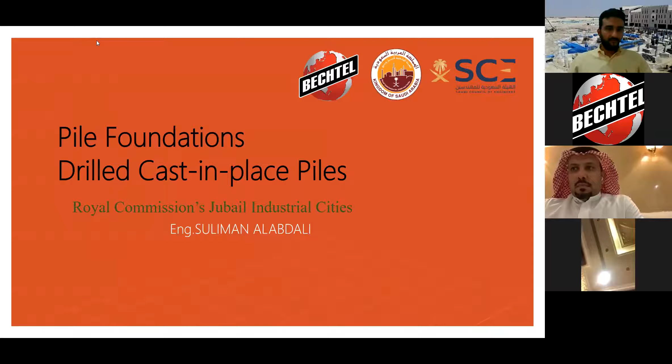Let me share. Okay. It is about the pile foundation, drilled cast-in-place piles. This is an overview of my presentation. I'm going to talk about the acceptance criteria of the pile work, general requirements for the drilled cast-in-place, what pile foundations are, and the purpose of the pile foundation itself. And also I'm going to talk about the testing of the piles. This testing should be carried out after

casting the piles. These are some of the references that you can use. They are very useful references, actually. This is the ACI, American Concrete Institute, and ASTM. This is very useful. You can use it in the testing, and you can use it when you are drilling.

I will talk in general about the use of the pile. As you all know, piles are one of the methods for improving the soil. That means we have some soil that is very loose. It is not dense, not rocky soil. So we are using the pile. The main purpose of the pile is to transfer the whole load from the building to the foundation, and from the foundation to the pile.

For sure, we have a big difference in bearing capacity across soils in the kingdom. I'm going to talk about the kingdom. And just a small hint regarding how we know that we have an issue with the bearing capacity of a specific land. This should be done by soil investigation. As most of you are civil engineers, you know that we have to do SPT, CPT, and a lot of tests to investigate this land and see whether we have an issue with the bearing capacity or not.

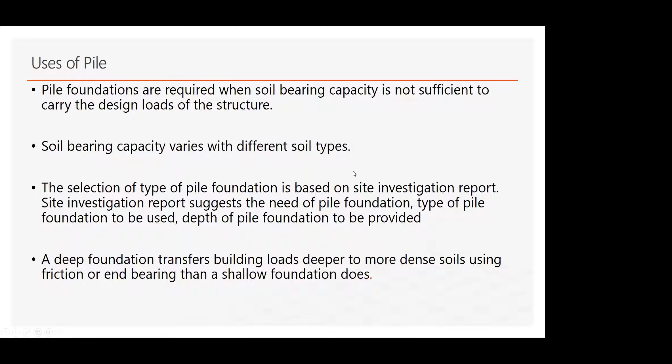Just to make a very clear idea about the bearing capacity: it is to avoid the foundation to penetrate or to sink inside the soil or to flip over. This is one of the main purposes of the bearing capacity. This is a general idea about it, actually. And sure, it is like a deep foundation, it transfers the building load, as I already mentioned.

Okay, this is actually some requirements. I think it is very important in any pile activities, because actually, if you see in my background, this whole area, it was all only piles. So during this activity, it's gonna be a very, very messy site, like a lot of slurry, muddy and concrete, and a lot of things that we have to take care of.

First of all, we have to do a traffic management plan, the TMP. This is to distinguish between the pedestrians, the trucks, trucks of concrete, bulldozer, backhoe, concrete pump, and the rig machine that is used for drilling. A lot of things we have to take care of, and we have to agree before we start this activity.

Actually, one of our requirements here in Royal Commission, we have to do the method statement. How we're gonna work? What are the key personnel that have to be on site to supervise these procedures? What is the emergency contingency plan? All these things we have to take care of. And I'm going to talk about the things that we have in our contract between us as a Royal Commission and our contractor.

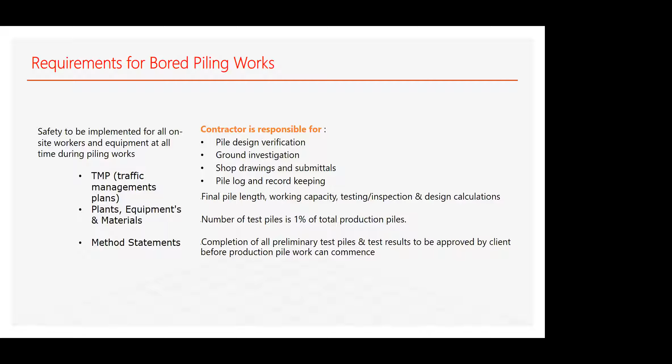As I mentioned here, we did like 1% of the total production piles, completion of all preliminary test piles. This is the test pile that I already talked about. It is only for test. We will not use it. We will not connect it to the foundation. If we want to take it out, we're gonna take it. So it is not useful anymore.

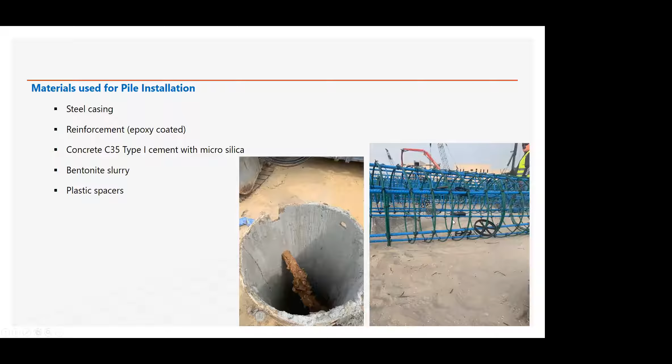Let me explain something about the bentonite. Maybe you will ask me why we are using bentonite. Actually, we use bentonite because our soil condition is very weak. It avoids any collapse. For example, if you drill your pier or pile and leave it for half an hour, or 2 or 3 days, if you drilled it to 15 meters, the next day you may find it has become 10 meters. A lot of collapse will happen, and this will reduce the length of the pile. And when anything happens to the length of the pile, it will for sure fail any test done in the future.

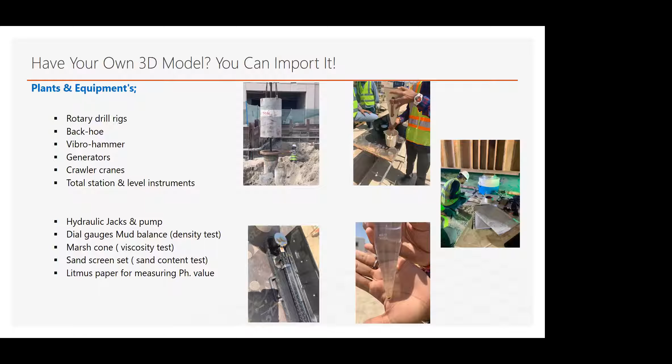By the way, bentonite is sometimes used in trenches that cannot have a good slope. To avoid any collapse, they put the bentonite in temporarily. And this is the litmus paper for measuring; we also measure the pH. So we have the viscosity test, density test, sand content test, and pH. This is only for bentonite.

For example, I have a pile like 30 meters length. So I have to make sure that the rotary is exceeding my 30 meters. It is not like 15 meters, because it depends on the situation. For example, Burj Khalifa, actually our subcontractor worked on that project. I think the height of the building is maybe 900 or 850, and they are using 60-meter length of pile. So if I have a rotary machine like 30-meter, it will be useless. So we have to make sure about it.

And also, what is the most important thing is the diameter of the rig machine. This rig machine comes with a head. So the head, for example, if I have my pile's diameter 800, I have to bring it like 850 or something like that, for sure. It will not be 800. I have to make it more for tolerance, for movement, the casing, and all these things.

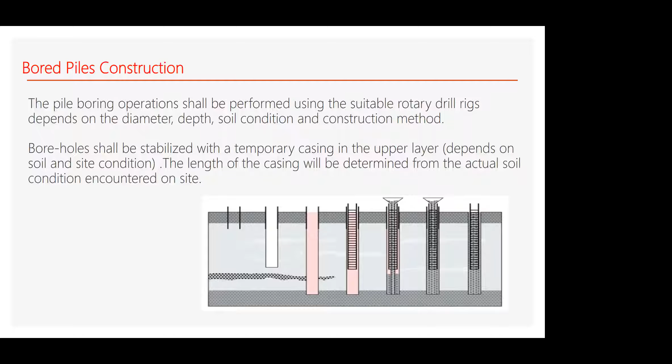As I mentioned, you can see this is the rig machine, and this is the bucket. As you can see, it is changeable. So this one is for drilling. For sure I'm gonna put the casing, and before I start any drilling activity, I will ask the surveyor to come and check the accurate coordinate on site. Am I right, or do I have some issue with the coordinate? So after I'm okay, I will give him a green light to go ahead with drilling. This auger machine or rig machine will do the drilling inside this casing.

So as I mentioned, it can verify all technical information such as pile coordinates. This should be approved by shop drawing, and also the cutoff level. For example, I have to know where I have to do the casting. If I have my pile here, my foundation should be here exactly. So I have to make sure. Sometimes I will make this pile extra to avoid any error during this thing. So I'm gonna have it like 1 meter or sometimes 50 centimeters, and then this extra I'm gonna cut later. I will show you some pictures of how we're gonna do that.

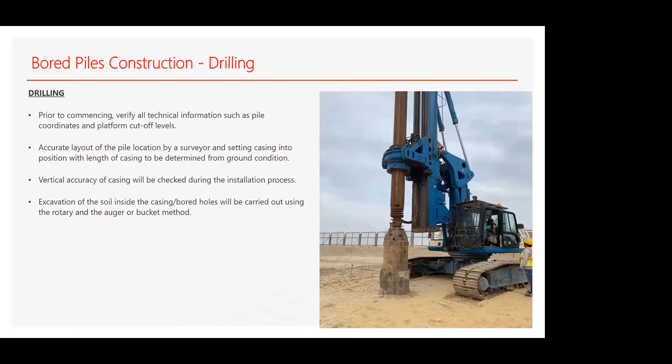So as I mentioned, drilling continues to the design foundation depth or refusal level using auger drilling. Pile length should be per the current construction drawing. For example, I have various lengths of pile. Sometimes I have 17 meters, sometimes 11 meters on the same site and for the same building, but it is a different pile cap. And by the way, we call the foundation the pile cap. So verify the final toe elevation of the pile. The toe level is the bottom of the pile.

And it has to be recorded. Each pile, we have to record everything about it: the toe level, top level, the elevation, where the cast level is, the surveyor. I'm gonna provide the contractor the exact cut-off level, the exact toe level, everything. This has to be agreed before we start.

So upon reaching the final depth, loose debris will be removed using the cleaning bucket. As I mentioned before, this is the cleaning bucket. I have to remove everything inside the pile. The depth of the hole should be checked by measurement. This is, as I mentioned, two ways.

Maybe the rig machine can have it, just to save time. Sometimes the supervisor will ask the operator, please check this level, depth, and he will check it. And then the consultant will come and use his method with a meter tape, and it is better. It will give you an accurate measurement.

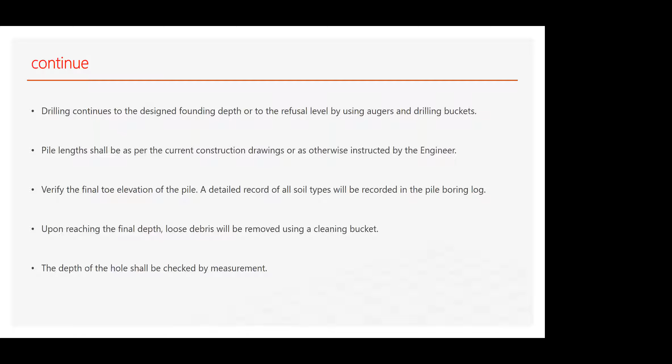Here, as you can see, after we drill the pile, we are putting bentonite, so we make sure that no collapse will happen in this pile. As I mentioned before, during the boring process, bentonite slurry is kept as high as possible so that no collapse will happen. That means the bentonite will hold on the wall of the pile, so the soil will not fall in. It gives more strength to the pile. No collapse will happen in this pile.

Upon completion of boring, the bottom of the pile is cleaned with the cleaning bucket, as I mentioned. This is what I already talked about: mud balance, density test, viscosity test, sand content, and the pH. All these are for bentonite only. So I have to make sure about my bentonite. It is very important, actually.

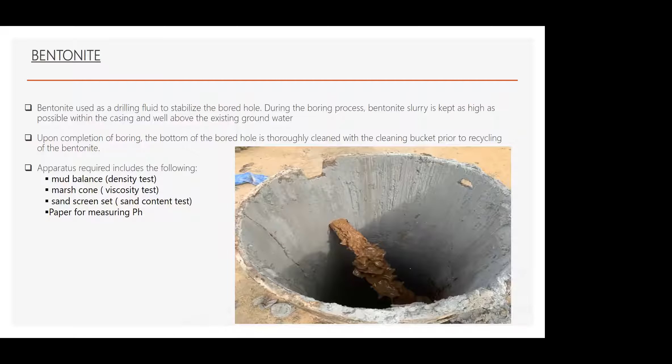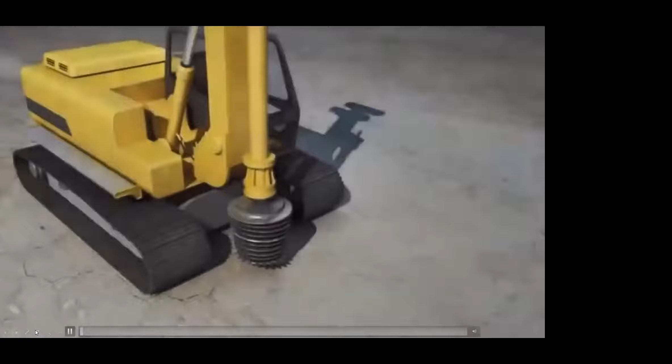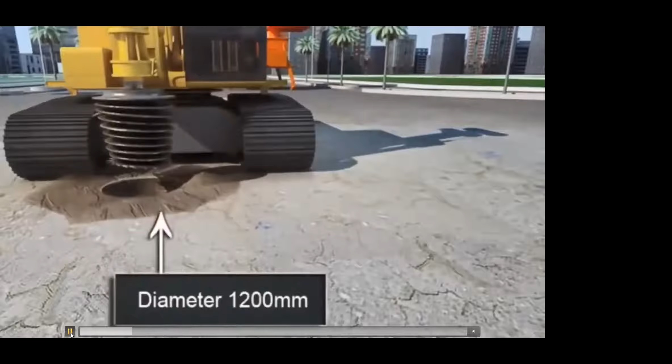This is a video I'm going to share with you. As you can see, this is actually describing the whole procedure. Here in this situation, they have a diameter of 1.2 meters. And maybe someone will ask me, according to what am I going to use this casing?

Let me explain about this project, because it was like 2 years ago. We are using the casing according to the soil condition. For example, I have a 10-meter pile. Because I have a very weak ground, I'm going to use a 7-meter or 8-meter casing, because I know the classification of this soil from 1 meter until 7 meters is very loose sand. So it is better to be cased. And I make sure the rig machine will be very vertically aligned.

So this video cannot give you a good idea whether I'm going to use a short casing or not. Actually, I worked with both. In one of the projects, I did not use any casing because the soil classification was very strong and no collapse would happen. As you can see, here we insert this casing, and I'm sorry, but this is the video that I have. In this procedure, he did not use the vibro hammer. The vibro hammer is only for inserting the casing.

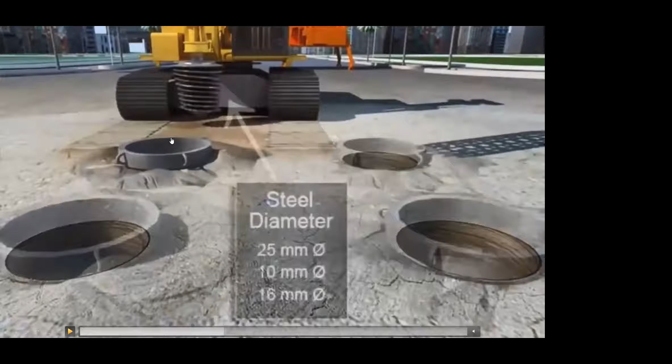Another thing I have to mention: for example, I start to drill one of these piles. If I drill this pile and cast it, I couldn't drill within 6 meters next to this pile. Otherwise, I'm going to disturb my piles. So you have to make sure to leave your pile for a minimum of 24 hours so that it will be strong enough to sustain any disturbance close to it.

After we did the drilling, we're going to insert the rebar cage. As you can see, he's inserting the rebar cage. And make sure to maintain the cover. It is very important. The cover spacers will hold the cage from the side, so it will be 7.5 centimeters everywhere around the pile. Okay, this is after inserting the cage.

This we have to use, we call it the tremie pipe. For example, if we want to cast a pile that is 17 meters, and we start our pump from the top of the pile, maybe the concrete will never reach the toe level or bottom level of the pile. So we are using this tremie pipe. It looks like a straw, taking the concrete from the top to the bottom. That's how I make sure my concrete reaches the bottom, because I should cast from the bottom until it reaches the top. So I have to make sure that I'm using the tremie pipe in the pile.

For example, my pile is 11 meter. If my pile is 11 meter, I have to use tremie pipe minimum 12 or 13 meter. So when I use the tremie pipe, I will hold it with the crane.

What's happening with the crane? The crane will take this tremie pipe and insert it inside the pile until touching the ground, then just take it up a little bit so no fall down with the concrete. Because if we use a concrete pump like 2 meter or more, actually in our specification, 1.5 meter is the maximum height for casting the concrete. Otherwise a lot of segregation will happen, because pumping with more than 1.5 meter will cause segregation with the concrete.

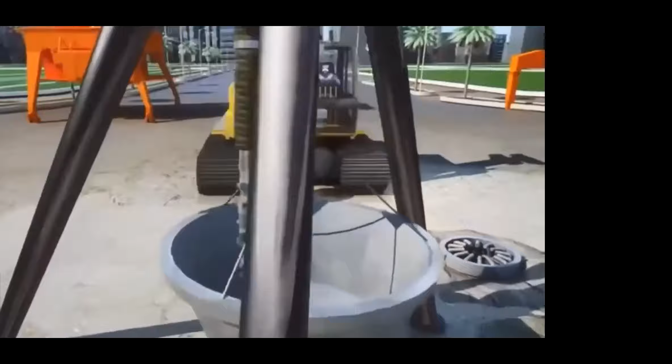By the way, when we are putting the bentonite, we are not removing it. Don't worry about the bentonite. When you cast the concrete from the bottom to the top, this casting will do some replacement of the bentonite. That means the concrete will stuck in the bottom and then kick out the bentonite all through the pipe.

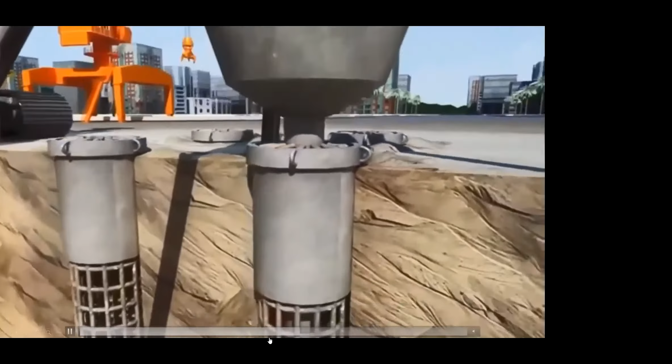Here in this sand, he did not use any bentonite because he has good soil, so no need. You can see how it is starting. The other thing I already talked about is the bentonite. If he uses bentonite, you will see it moving outside. Because of that, we are always testing the bentonite, because if the bentonite is more dense than concrete, it will never go outside of the pile. So it is very important to test the bentonite.

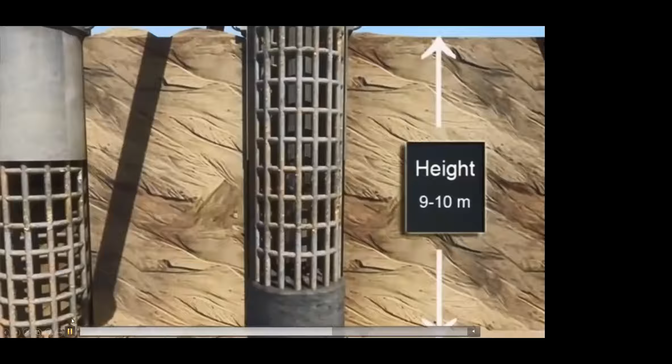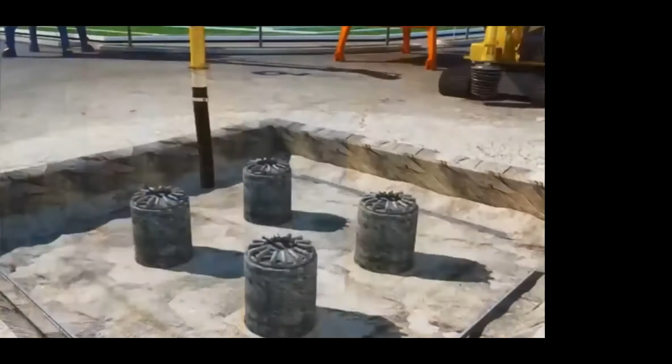This is after the casting. This video will also give you some idea about how the pile looks like.

You can see here, according to the requirement for this project, each foundation, a square foundation, should be with 4 piles.

After that, now what he is doing, he is casting the blinding for the foundation, or let us call it pile cap.

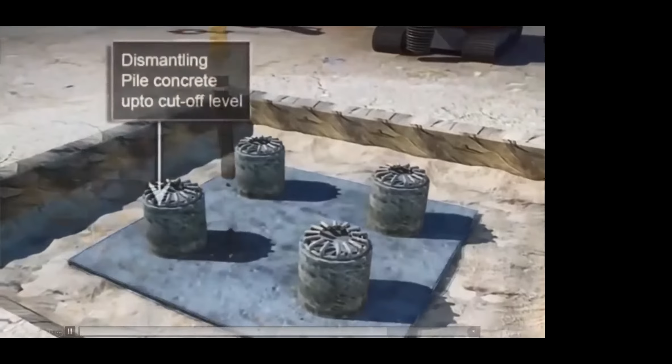Now let me go back. We already casted this pile. As I mentioned, you have to leave some extra length of the rebars. This extra length will work like a development length inside your foundation. The good practice is to leave this part covered with some PVC, so that you will not damage your rebars while connecting the pile with the foundation.

I will give you some picture. You can see he already casted the blinding, and now he is reaching the cutoff level. You can see this is the cutoff level, meaning the bottom of the foundation will be exactly at this elevation.

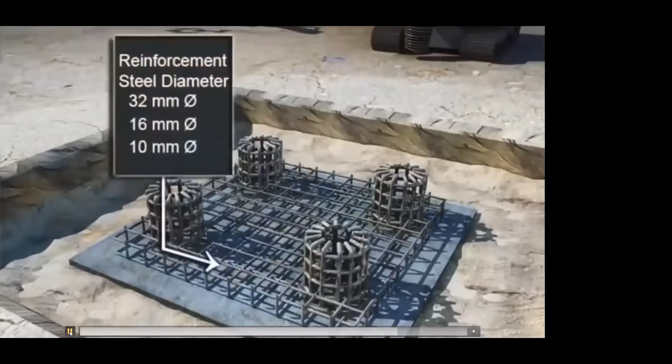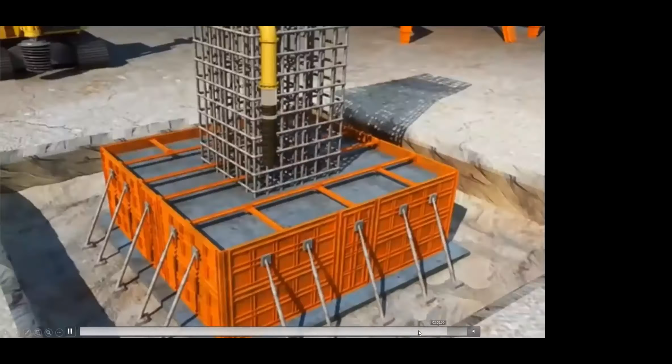And you will see they already started the pile cap. This is the reinforcement for the pile cap.

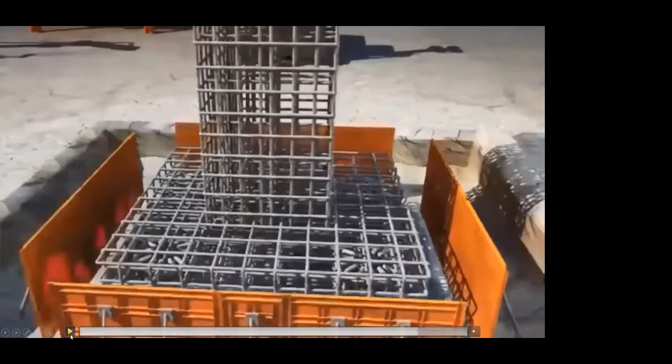After that, he's gonna put the rebars for the column, which we use to transfer the load to the pile cap, and from the pile cap to the pile. Let me explain something.

Do you know the pile is sometimes combined in type? How does the pile actually work? We have some friction pile, where all load comes from the friction of the pile. We have the end bearing pile - for example, I have a 10 meter pile, and my ground is 9 meters of loose sand, very bad soil, very loose, but the 10th meter is a rocky level. So I want to reach this rocky level, and it works like an end bearing pile.

As you can see, now I'm casting the pile cap or pile foundation. And that's it - this is my whole procedure, how I'm transferring everything.

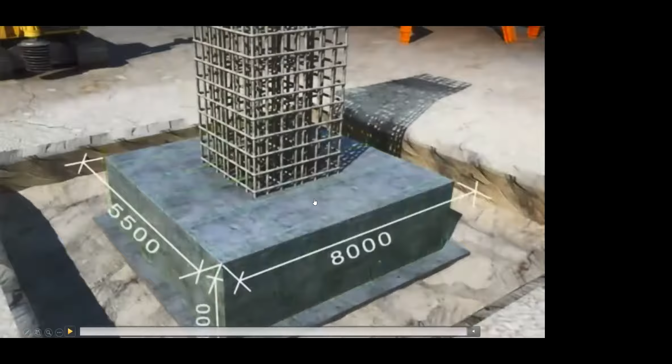But before these things, we have to make sure about two tests, very common everywhere around the world, before we proceed with the concrete. First thing, we have to make sure the concrete is according to our mix design.

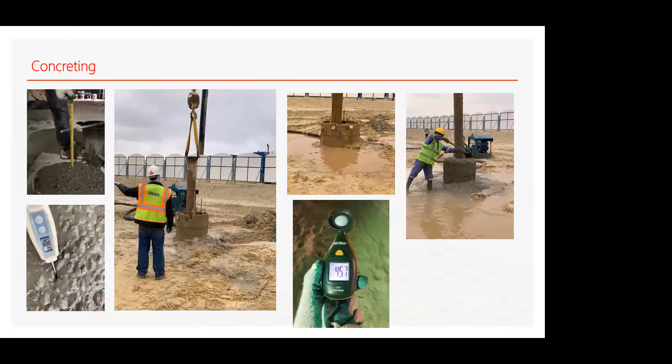Actually, you can see this is the pile size, from one of my projects I worked on. This is the pile size, the diameter and the pile length. As I mentioned before, I have 11, 13, 15, and 17 meter lengths - this is the various lengths of the pile. This is the total ultimate capacity.

Sometimes, for example, the designer will tell me this foundation will take a load, for example, 4,541. So I have an idea about how much the load is. When I know the load, I will know how to test this pile. So what I have here is the total ultimate capacity - I have to check this pile.

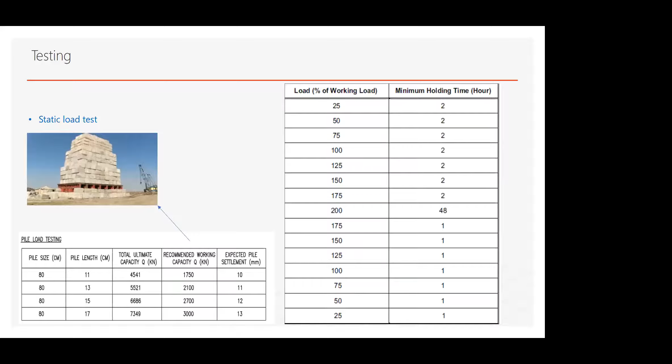Actually, sometimes as I mentioned before, maybe I had some issue during the casting - maybe I used very dry concrete, I have some segregation in the concrete, I have honeycomb, any issue - these things will figure out that I have an issue. Also, just to mention, in the static load test, if the settlement happens, I have an issue, I have to discuss with the engineer. The conclusion: the pile is not working for my site, it is not workable.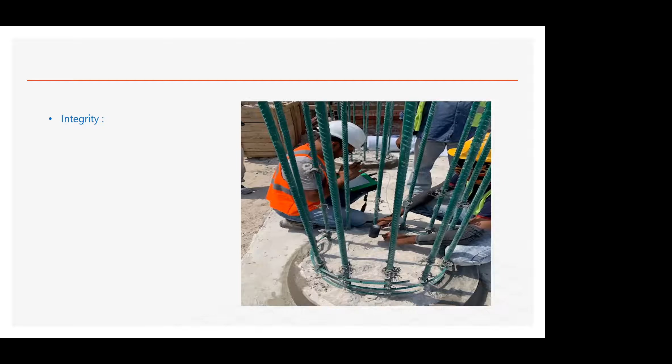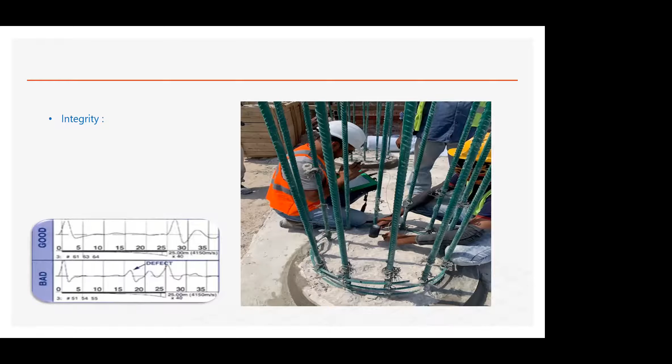So the other thing is checking if there's any issue in this pile, it will show me. As you can see here, this is the graph of the pile. For this exact graph, you can see the wave starting from 0 and going very smooth until it reaches 27 - that means after 27 meters, I don't have a pile, that means I'm okay. But the other one you can see, this is the good one - in the bottom you can see how I have a defected pile, like at 16 meters I have a defect, an issue, my wave is not in a smooth line. I have an issue, this pile has failed for me.

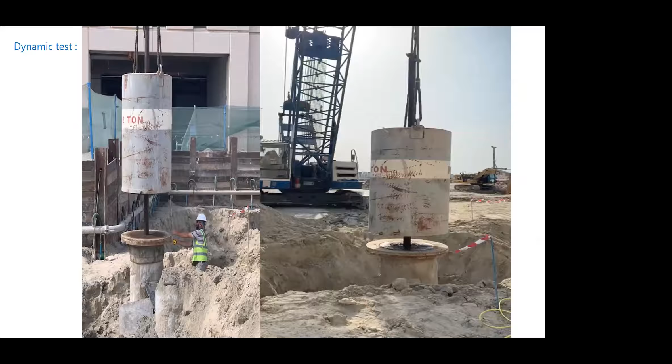This is one of the dynamic load tests. This test is very fast, not like a static load. I will put some weight according to my specification or the recommendation of the designer. He will tell me that your load will be like 2000 kilonewton, so I will use 2000 kilonewton - I will not exceed it, otherwise I will damage my piles. I will give you a picture - this is what they call the dynamic load test, like a free fall of the weight on the pile. This at the bottom is the pile.

Okay, and before I do this free fall, I have to put some sensors on the pile. That's why I excavated around the pile, because I already fixed some sensors, if I'm not wrong it was like 4 sensors surrounding the pile to check the behavior after the strike of the weight. You can also see the yellow cable, but I don't have any picture of the device they are using for monitoring this test.

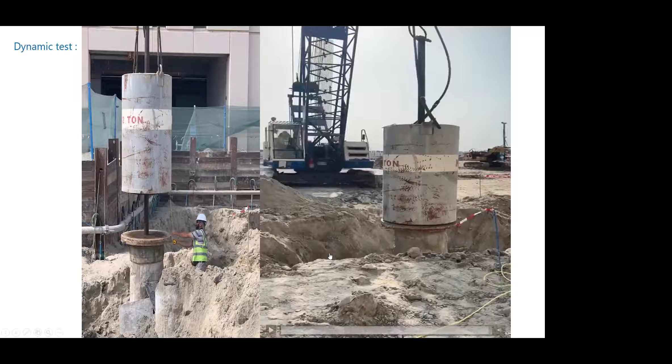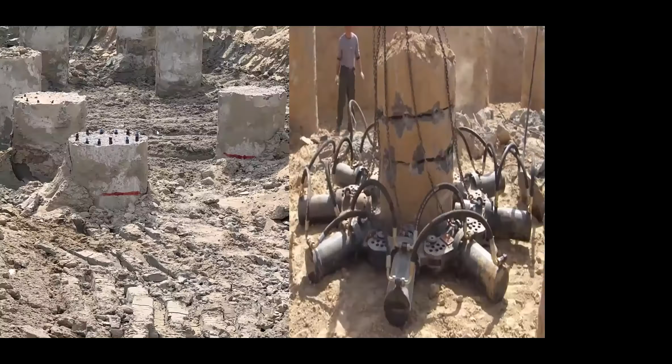Yeah, as you can see on the left, the red line is from the surveyor. He told me that this is my cutoff level. So please remove everything from the line to the top. Remove it, I don't want it anymore. My pile should be from here, this red line. And as I mentioned, the PVC is just to make it very easy to remove this concrete.

And the better practice for the cutoff level is this machine on your right. I will tell you why. When you use a jackhammer or these things for breaking the pile, you're going to make some disturbance in the pile, so it is not preferable. This is what they call the pile head breaker. It will break the pile at any place you want, and it is better practice.

For example, if my elevation should be 2 meters, I have to give myself some tolerance. I will not break it at 2 meters. I will give myself like 2 meters and 5 centimeters, to avoid anything happening.

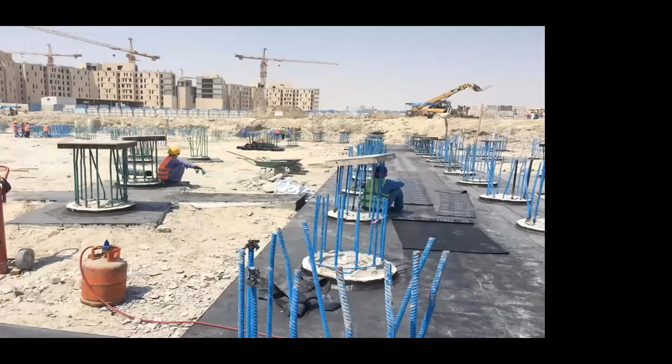This is one of the pictures after we removed everything to the cutoff level. As you can see, it is a neat and clean pile in one line. And to make it more clear, some pile caps or pile foundations have like 3 piles, because it is triangular. Sometimes it has like 15 or 16. You can see here, this pile is for a very big pile cap. It is for the auditorium, so it is a huge one.

So what we do, once we reach the cutoff level, we make the blinding, as I showed you in the picture. After that, we apply the membrane. These rolls are the waterproofing membrane, you can see them down there. If everything is okay with the concrete, I'm going to apply the waterproofing.

And for sure, we have a lot of specifications regarding surface preparation, applying the primer, then applying the membrane, and then covering the membrane with the protection board. If everything is okay, after that I will put my cover, and then I can start doing the pile cap or the foundation.

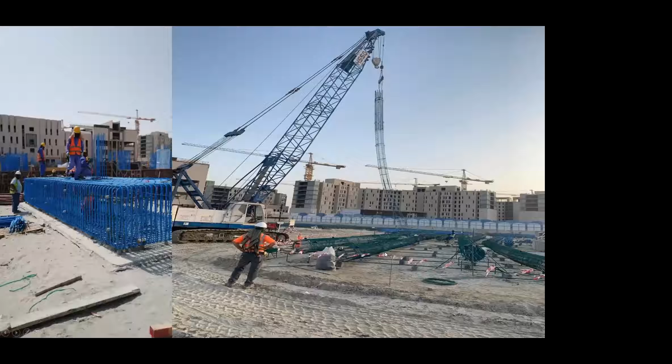This is on your left. You can see this is a pile cap. It is exactly like what I showed you in the video. This pile foundation, you can see these laborers, they are standing on this pile foundation. And down there, I don't know if you can see the laborers inside this pile cap.

He is preparing some tie wire for the column. So this foundation is for taking the load for this column. You can see the column, or the dowels for the columns. So it is only for transferring the load, and that's it.

On your right also, this is a picture of the crane. This is the crawler crane that I mentioned before. He is taking this steel cage and inserting it in one of the piles, which is approved by the inspector. It is okay according to our depth. Everything is okay. Bentonite is okay, so we can do it.

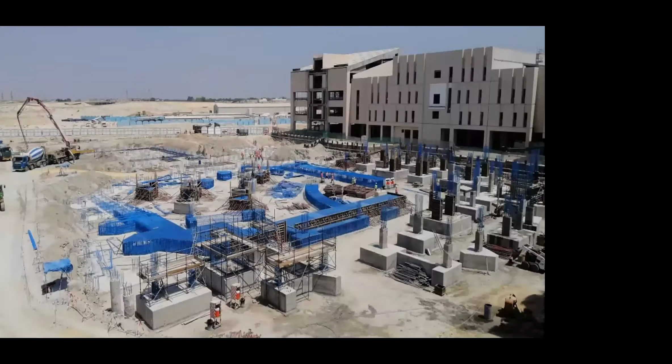This is a big picture. As I mentioned before, you can see the blue thing. The blue is the rebars actually. It is epoxy coated, fully protected from the sulfate. And you can see in the left corner some piles. Actually, we were working in parallel, doing the cutoff level and the pile cap, because we already finished all the testing, everything.